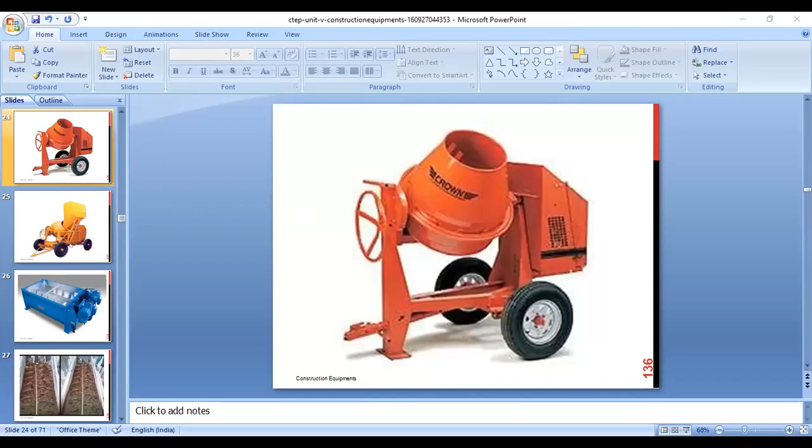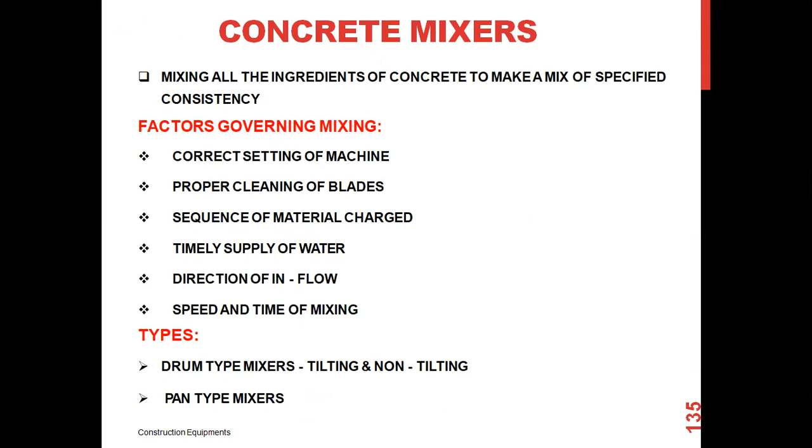The timely supply of water is also a good factor for concrete to be well prepared. The speed and timing of these mixings can be keenly observed, and the rotation of the drums with a constant speed for the mixing of concrete materials can be seen.

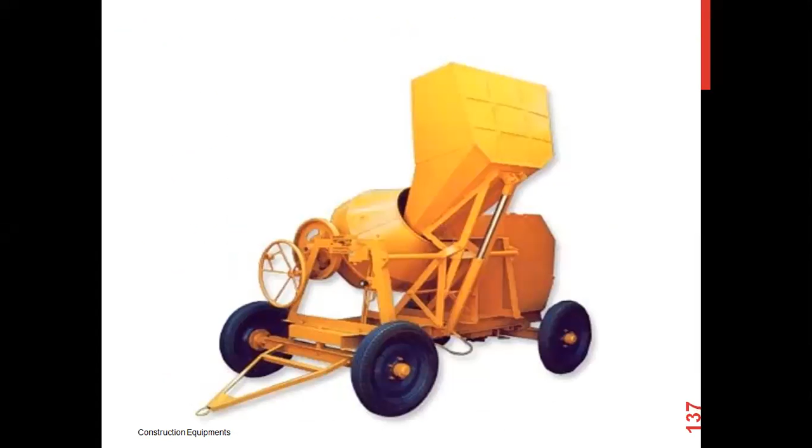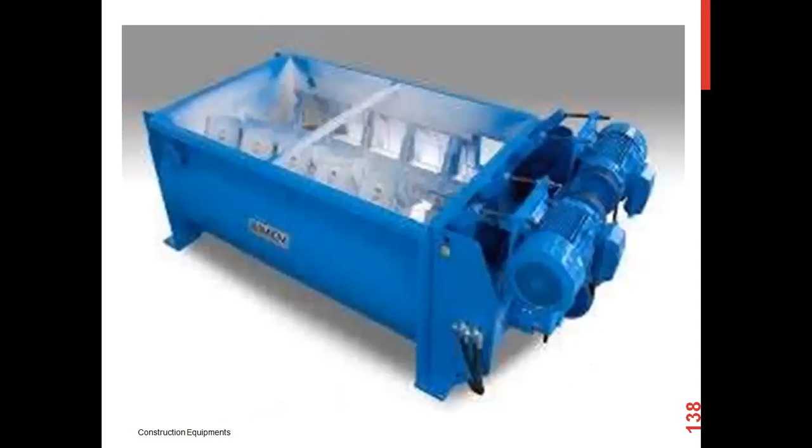These are the drums. Here in this drum you can see the inlet and outward materials. These are the plates where the plate mixers are seen.

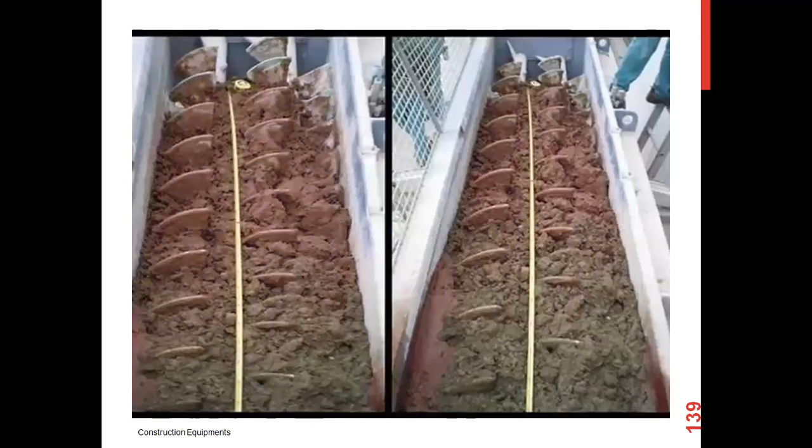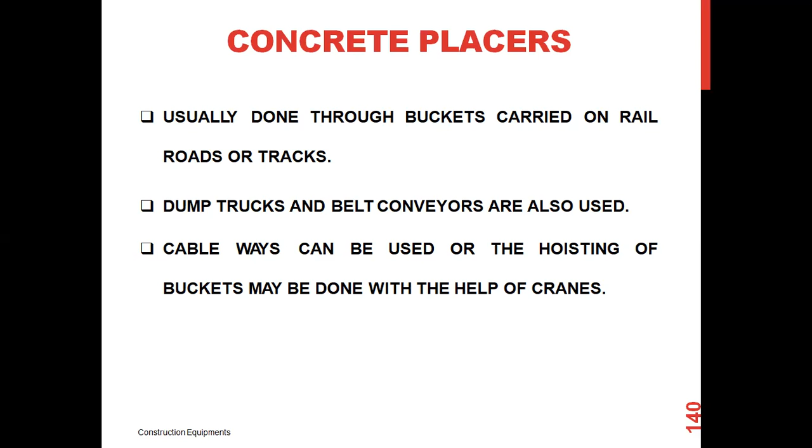Here you can see the mixing of these concretes and the concrete placers, usually done through buckets carried on railroads or tracks. Dump trucks and belt conveyors are also used for concrete placing on railroads or tracks. Cableways can be used or the hoisting of buckets, maybe done with the help of cranes.

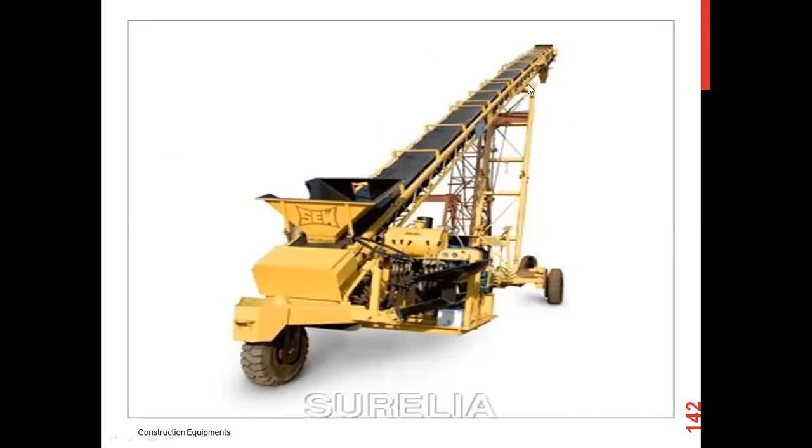These concrete placers, in these belt conveyors, the concrete can be discharged at this point and carried to the point of discharge where we need the concrete to be placed. Here you can see these belt conveyors.

Here the discharge of this concrete from the plant is carried and discharged onto these belt conveyors, which can carry the concrete to longer distances and place it wherever needed.

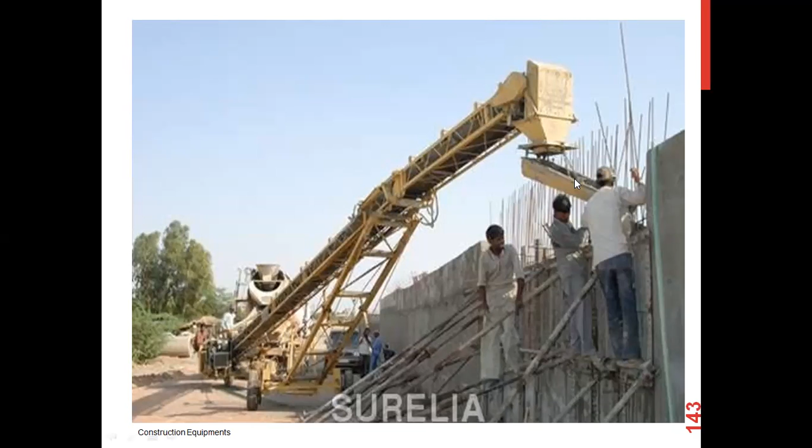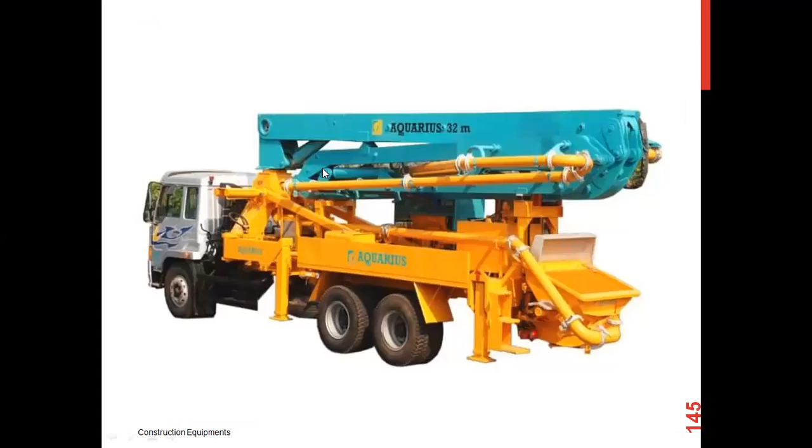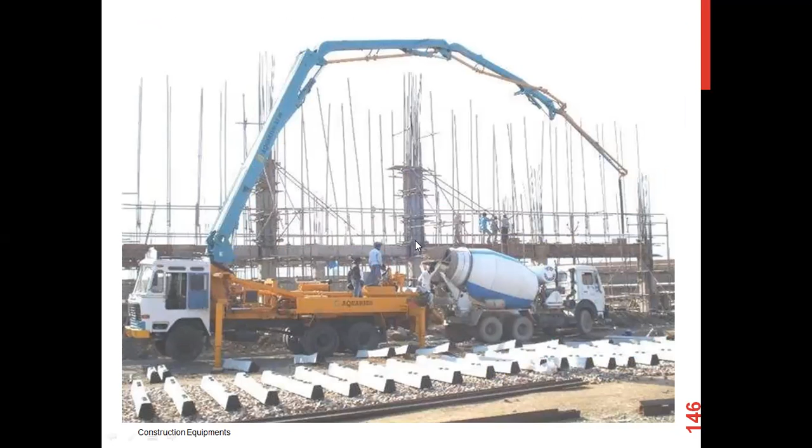These are the carriers of the concrete, and you can see here a hydraulic machine arrangement has been made, and the concrete is poured here and can be discharged here.

Dredging equipment is used for excavation from riverbed, lake, or sea for the purpose of deepening them. Dipper dredgers, backhoe dredgers, bucket or ladder dredgers, suction dredgers, and grab dredgers are used.

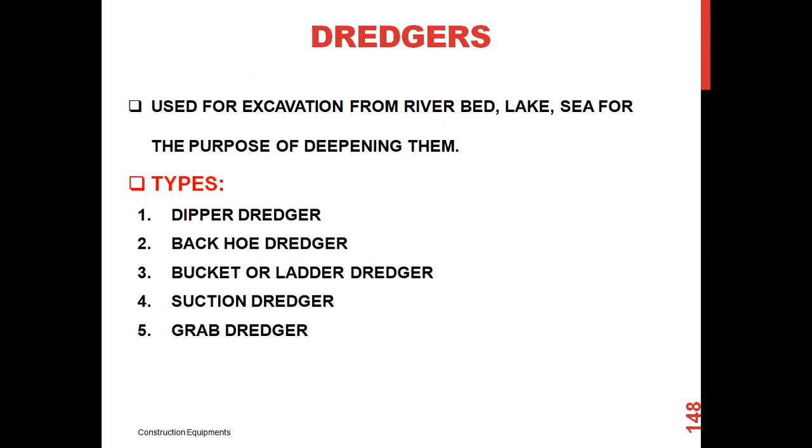It is usually mounted on a floating platform. The boom can rotate through 180 degrees. Production rate is 50 cubic meters per hour, bucket size 4 to 6 cubic meters. The dumping range is about 30 meters and the depth is 15 meters. They are suitable for rock material dredging, clay, and confined spaces of docks and narrow channels, though with low production rate and less depth.

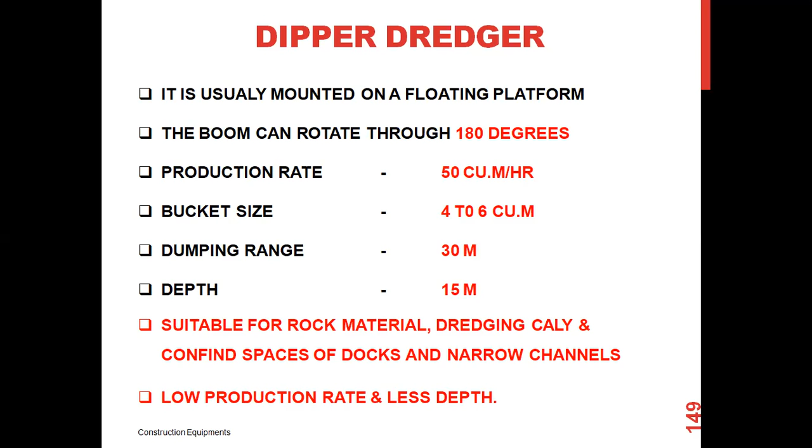Dipper dredgers. Backhoe dredger is usually mounted on a floating platform. Production rate is about 100 to 400 cubic meters per hour, the bucket size is 1 to 6 cubic meters, and the depth is about 18 meters. These are suitable for rock material, trenches, etc.

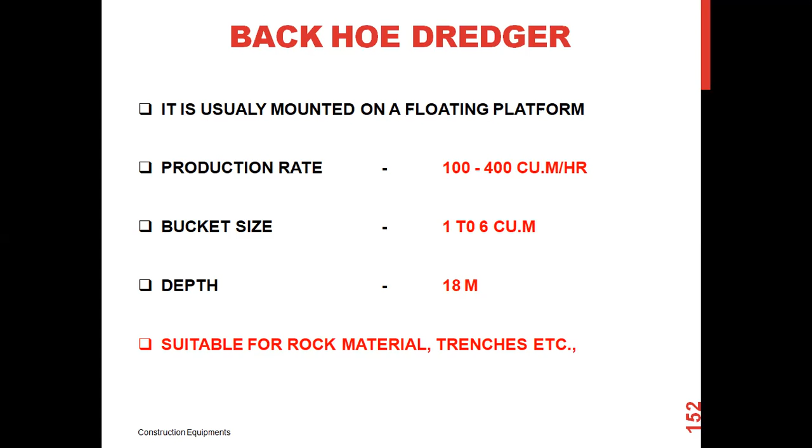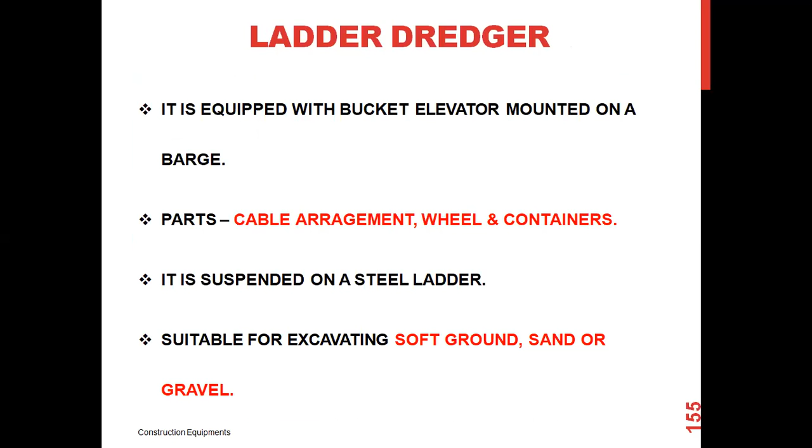These are the backhoe dredgers. The ladder dredger is equipped with a bucket elevator mounted on a barge. The cable arrangement, wheel, and containers can be seen. It is suspended on a steel ladder, suitable for excavating soft ground, sand, or gravel. These are the ladder dredgers, a bucket ladder.

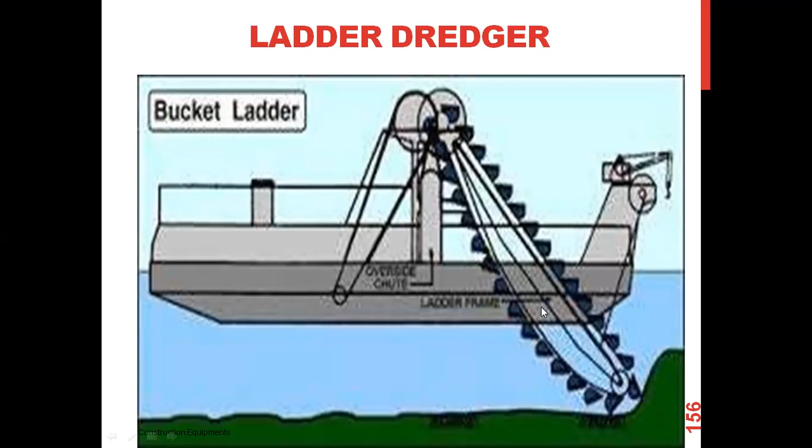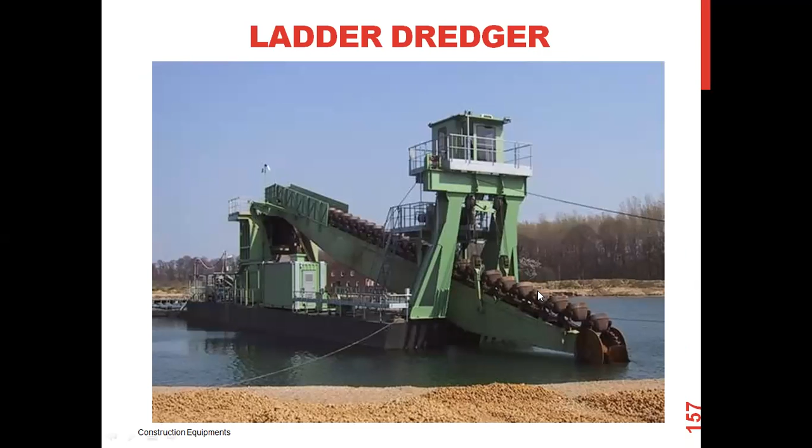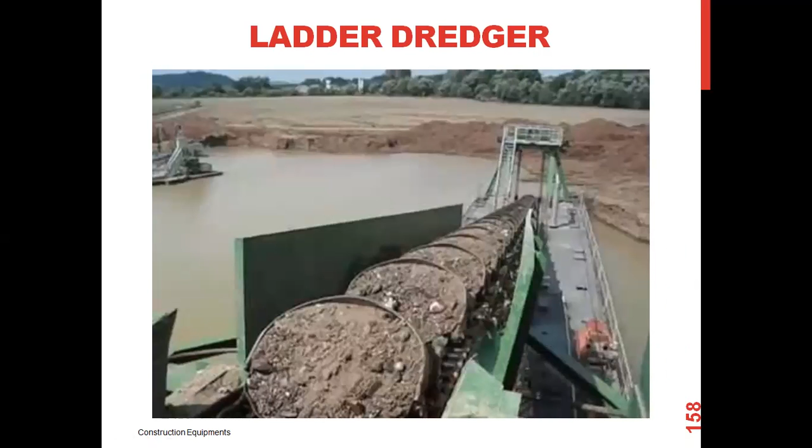You can see here, when rotating, these buckets can be filled and lifted towards here and dumped. So a bucket ladder has been arranged on these ladder dredges. These are the buckets which help to dredge. The buckets are filled with the soil which has been dredged and can be moved to the surface.

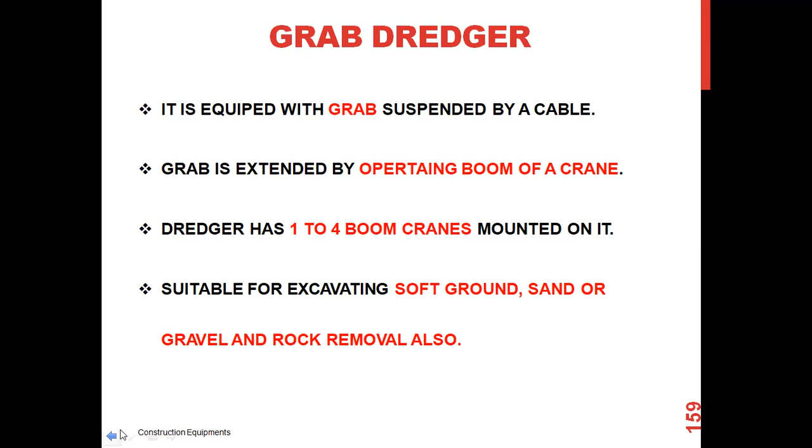Grab dredges are equipped with a grab suspended by a cable. The grab is extended by operating the boom of a crane. The dredger has 1 to 4 boom cranes mounted on it, suitable for excavating soft ground, sand or gravel, and rock removal also. These are the grab dredgers.

The suction dredger is similar in operation, except it consists of a pump excavator mounted on a barge with a suction line supported on a ladder. The plain suction dredger is free running for granular material, and the cutter suction dredger has a 3000 cubic meter per hour output capacity and 6 kilometer pumping range.

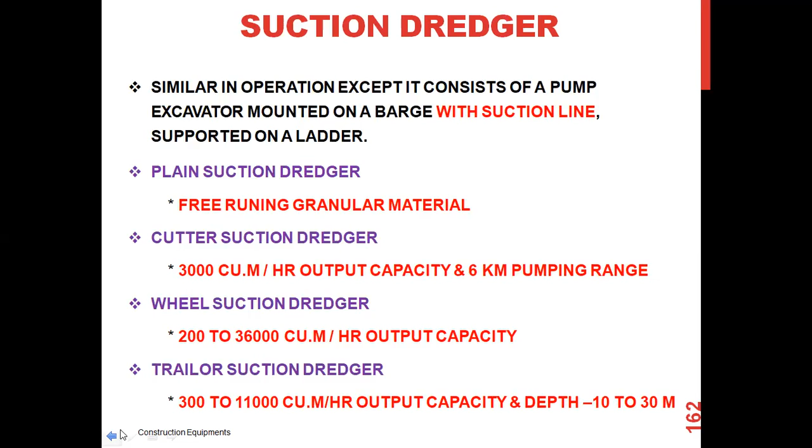The wheel suction dredger has about 200 to 36,000 cubic meter per hour output capacity, and the trailer suction dredger has about 300 to 11,000 cubic meter per hour output capacity and a depth of about 10 to 30 meters. The plain suction dredger, here the suction of these materials can be done and carried to the outer surfaces.

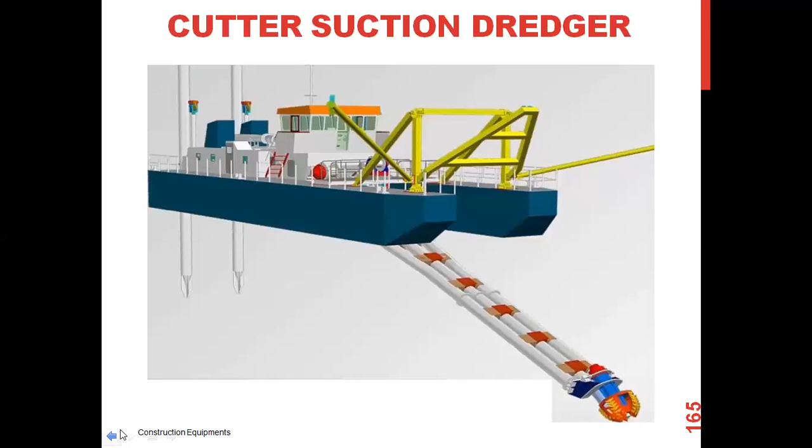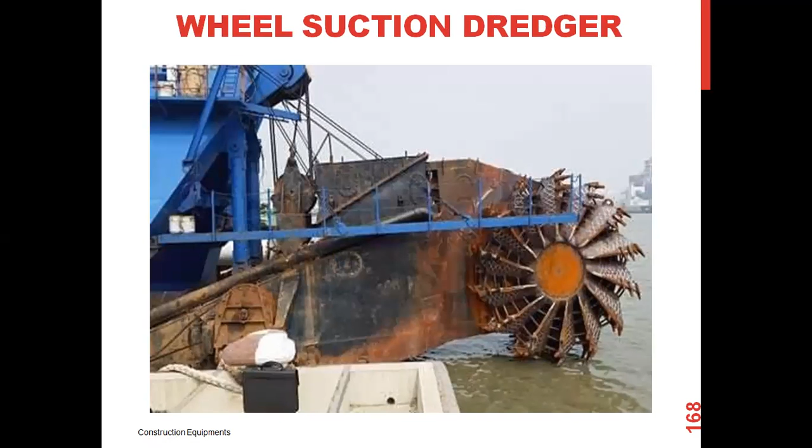The cutter suction dredger, wheel suction dredger. Here the wheel arrangement can be seen, which can dredge and cut the materials beneath the surface, and the cut material can be sucked out of this arrangement.

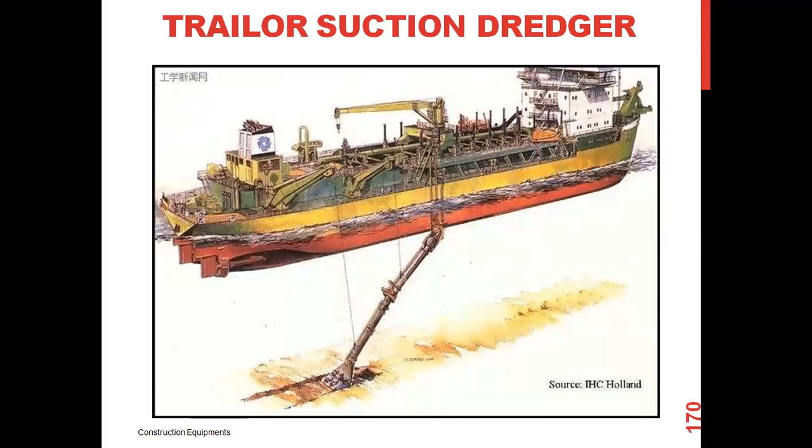Trailer suction dredger, trailer suction dredger. Here the suction pump and sand, the sucked amount of material can be discharged in here.

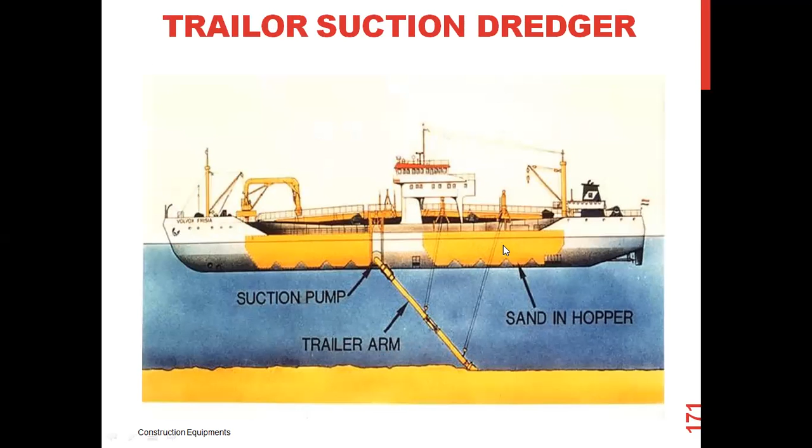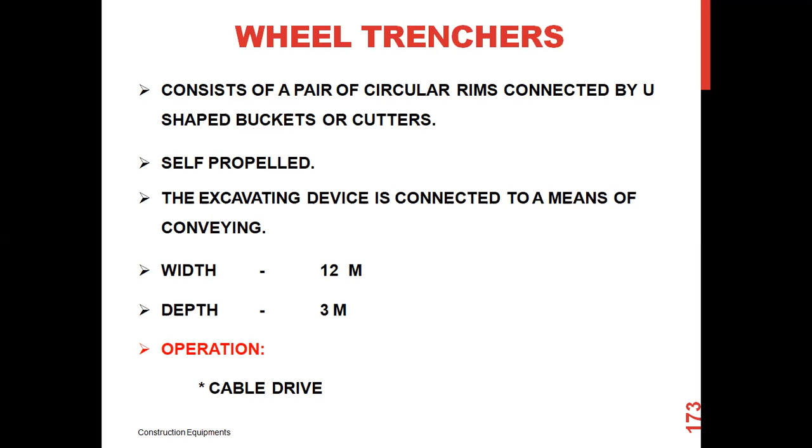Trenchers. Wheel trenchers consist of a pair of circular rims connected by U-shaped buckets or cutters. The self-propelled excavating device is connected to a means of conveying, which has a width of 12 meters and depth of 3 meters. They are cable drive operated wheel trenchers.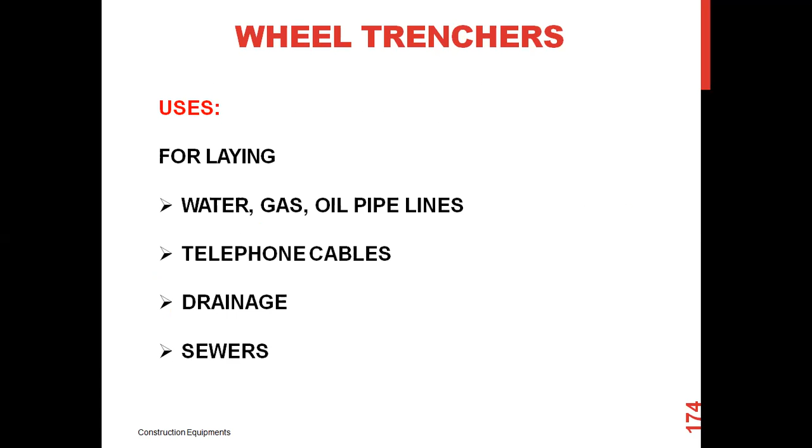They are majorly used for laying water, gas, oil pipelines, telephone cables, drainage lines, and sewers. These wheel trenchers are helpful; they trench the surfaces, and pipelines of gas, oil, or telephonic cables can be laid in these trenched areas.

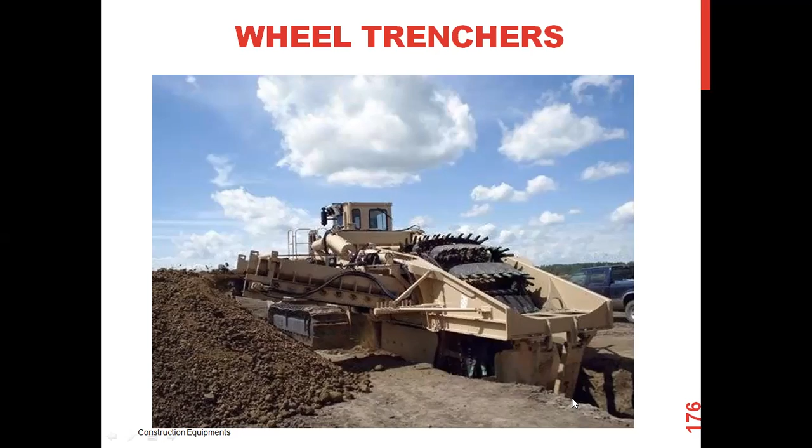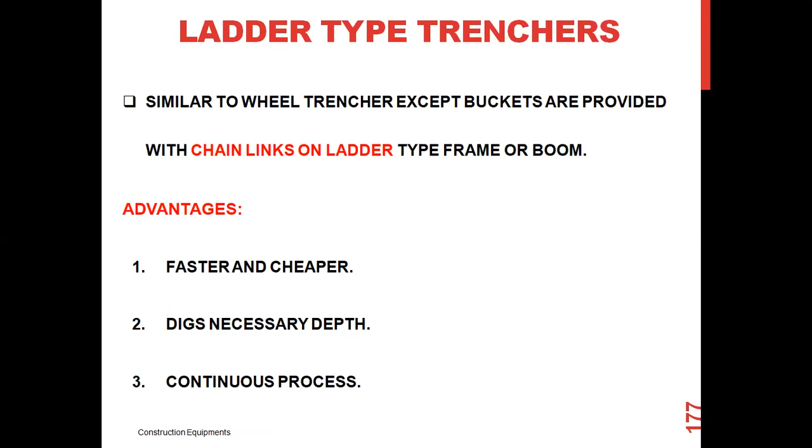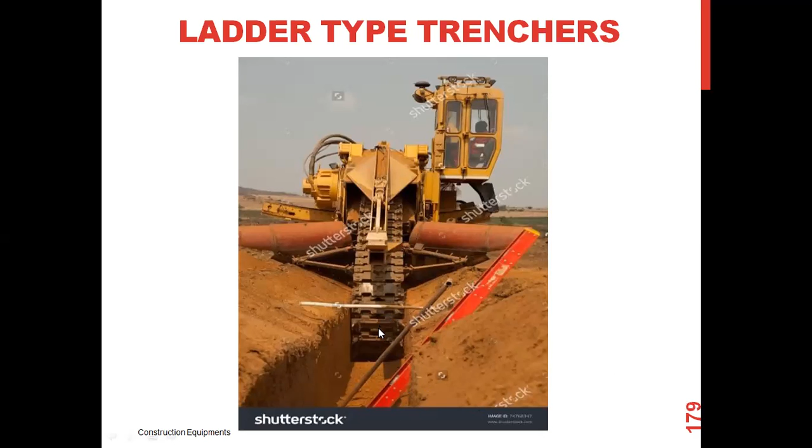These are the ladder type trenchers. Here you can see the trench, which has reached the desired depth, and which is faster and cheaper for trenching these lines.

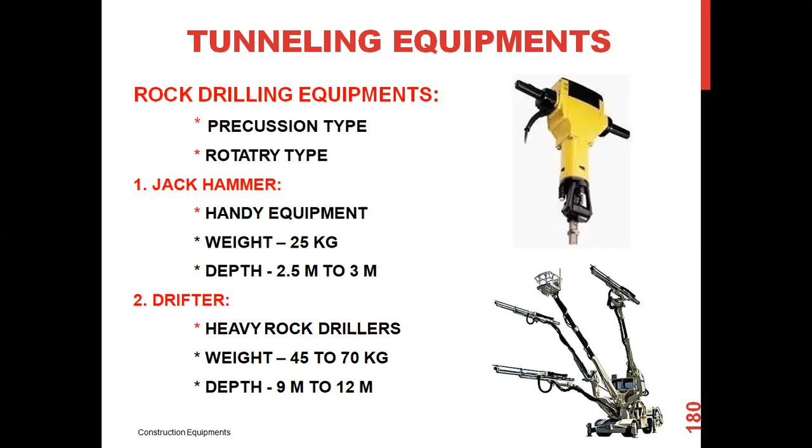The drifter, a heavy rock driller, weighs 45 to 70 kgs and can achieve a depth of 9 to 12 meters. Truck mounted rock drilling equipment has easy mobility and can dig to a depth of 15 meters, drilling holes along an angle and vertically down.

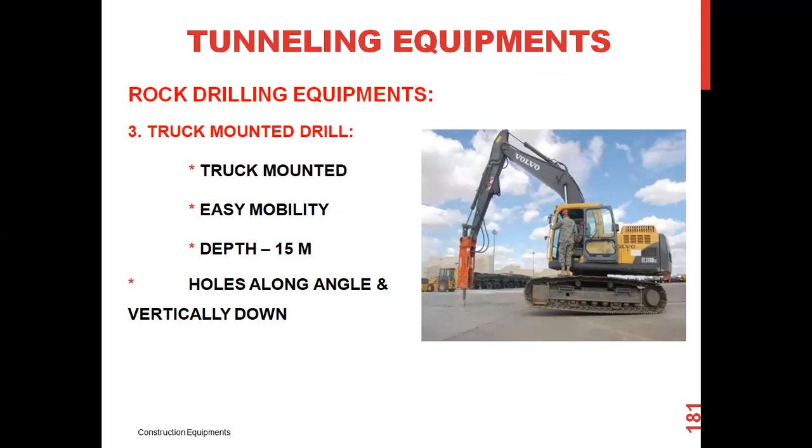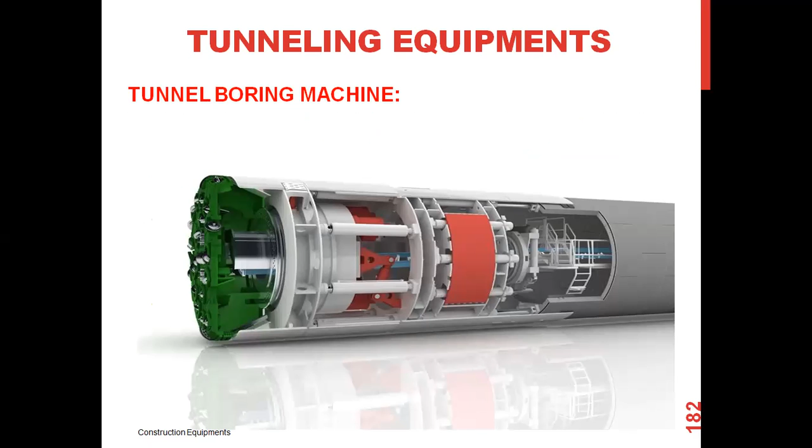Tunnel boring machines are majorly useful for boring tunnels and can be seen helping in the construction of subways or any underground tunnelings using these tunneling equipments.